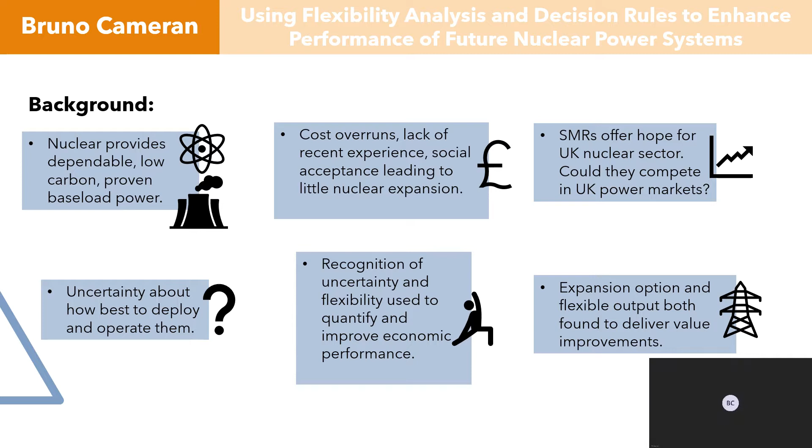I will now talk to you about my individual thesis, which focuses on nuclear power and more specifically small modular reactors. Nuclear power is currently the only proven low-carbon, reliable source of baseload power. Because of this, it could play a large role in decarbonising the UK power sector, which currently produces 90 megatons of CO2 per year. Despite this, no new nuclear power stations have been constructed in the UK since 1995. Cost overruns, a lack of recent construction experience, and safety concerns have all contributed towards this.

One way of potentially overcoming these problems is through the deployment of small modular reactors, or SMRs. These are designed to be small to exploit benefits of their size, such as the ability to be factory fabricated, thus reducing construction costs. This study looks at how SMRs may be able to emancipate nuclear power from government subsidies by being able to compete in UK power markets. Not being dependent on government subsidy and being cheaper to deploy would in theory remove two of the main barriers to nuclear deployment. If SMRs can successfully be deployed in the UK, then they may make a significant contribution towards decarbonising the UK power sector.

Because SMRs are still currently under development, there is no experience as to how best to operate and deploy them. If they are to compete in the competitive power markets, there is also significant uncertainty around the price and demand that they will be able to exploit. This uncertainty could discourage investment and hence limit the emissions reductions achieved by SMRs. Stochastic modelling was used to provide a quantitative analysis of system performance to assess how viable it is to deploy SMRs with no revenue certainty and instead to compete in the UK power markets.

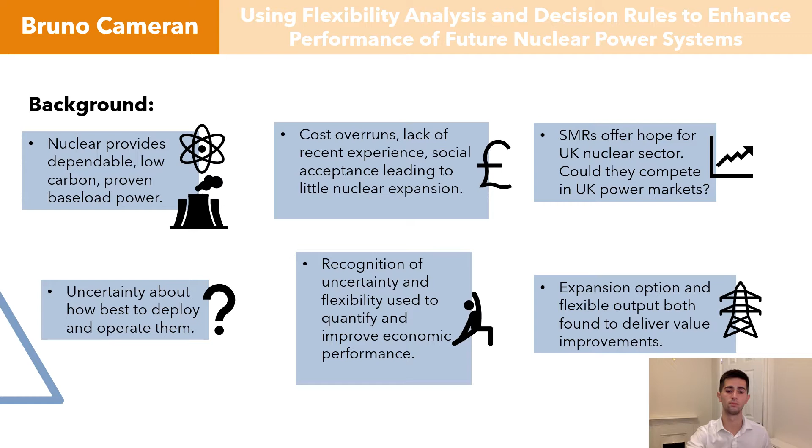To stochastically model the system performance, we first attain parameters for the evolution of the uncertain variables, that's electricity price and demand, from historic data. We then feed these variables into the model of the system, which produces the corresponding system performance, i.e. how much money the system either makes or loses over the 30-year simulation. This simulation is run 10,000 times, and the average of all the system performances is the expected net present value, or ENPV. The system size was then enumerated to find the optimum. This was found to be 58 modules, which is 3.48 gigawatts of electrical capacity.

This research shows that SMRs have the potential to deliver large economic value whilst also delivering low carbon and reliable power. They therefore are worthy of continued research and development, as at present their technology readiness level sits at 4 or 5. This study also finds that the ability to start with a small system and expand according to market conditions delivers the largest increase in economic performance, whilst also reducing the downside risk and limiting potential losses.

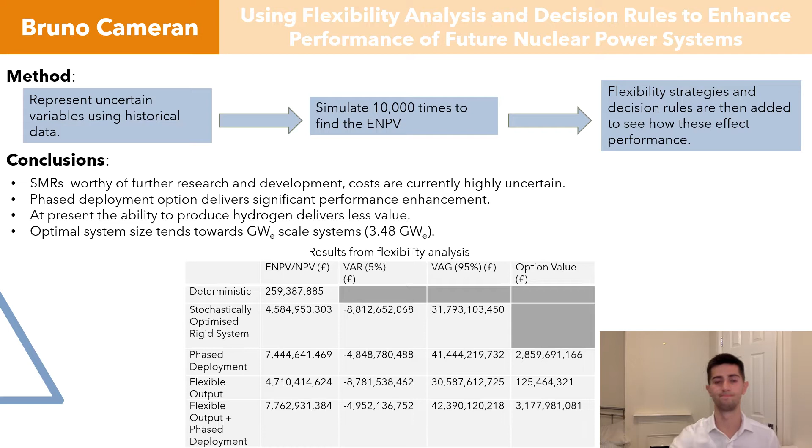The increase of renewable energy in electrical grids makes new challenges appear. For instance, the intermittency of renewables creates a mismatch between the demand and supply curve. A few solutions exist to mitigate this problem: energy storage, amongst others. Energy storage consists in storing energy when excess energy is present on the network and then releasing this energy when demand exceeds power generation.

A lot of different technologies for storing energy already exist, and a few use reciprocating devices. That is to say, devices that compress a fluid, such as air or hydrogen, from a low pressure state to a high pressure state. It's easy to understand that these reciprocating devices really are at the heart of these energy storage technologies. Therefore, knowing precisely what happens in these devices is key to optimize their functioning.

Moreover, heat transfer is one of the biggest sources of losses in such devices, and therefore modeling heat transfer is critical to minimizing losses and maximizing round-trip efficiency for storing energy. Using computational fluid dynamics to model the physical phenomena that interplay inside reciprocating devices has proven to be really efficient, but sometimes does require a long computational time, which can be a problem when you want to iterate your simulation over a wide range of cases, for example, to find optimality.

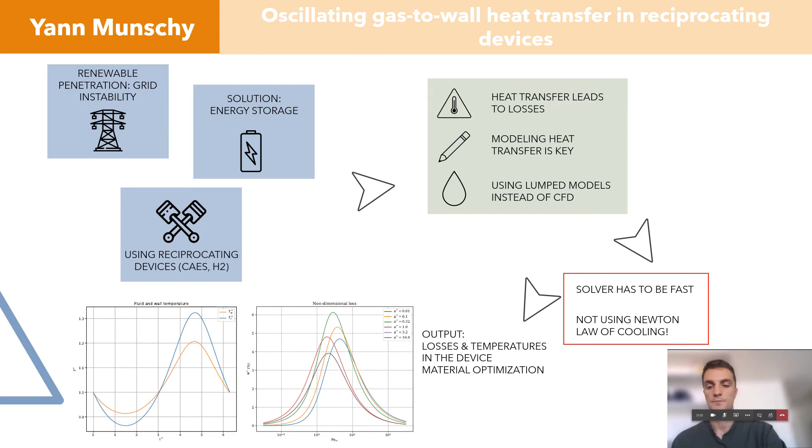And as you can see, the outputs of the model are the temperature profiles of the fluid and of the inside wall. These two quantities drive thermal losses. It is then possible to compute losses for different parameters, as done on the right curve. The first implemented solver uses Fourier series and spectral analysis, while the other one uses finite differences to solve the partial differential equation that comes from the model.

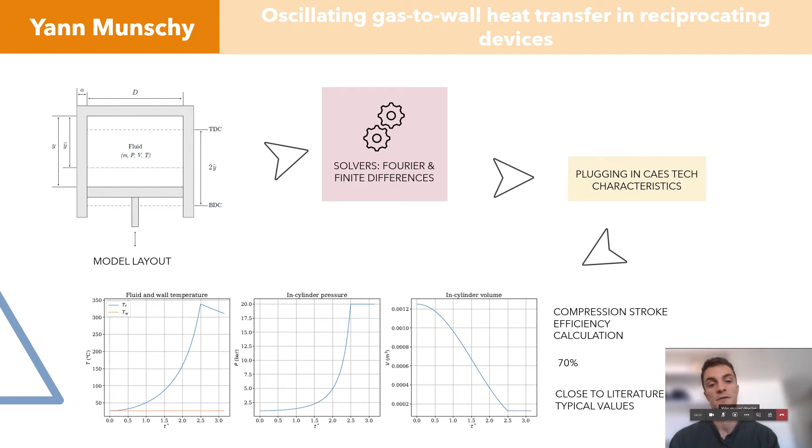From those curves, you can derive a theoretical thermal efficiency of the device. And it's quite interesting because the model gave 70% efficiency, a number which is quite close to the numbers you can find in the literature, around 70% as well. The model only takes less than a second to solve, so that's a good alternative to computational fluid dynamics while being reliable. It is then possible to use it to iterate over different materials to find the optimum configuration.

Currently, most of the grid-related stationary energy systems installed are lead-acid, but there are also several newer technologies emerging such as redox flow batteries. These batteries' main function is to provide spinning reserves during grid failure and absorb or discharge energy to the grid to regulate its frequency and voltage. Redox flow batteries have many advantages, including high round-trip efficiency, scalability, flexibility, high responsiveness, and long lifetime, which allows them to be a strong and versatile contender for large stationary energy storage systems.

However, as a part of the low-carbon future, it's important to understand the environmental burden that lies behind the installments of these batteries. Currently, there is very limited systematic assessment on the environmental impact of redox flow batteries, and no other chemistries have been investigated other than vanadium. Therefore, this thesis is carried out to explore redox flow batteries in the larger picture. Lifecycle assessment is used as a method to investigate and compare the global warming potential associated with vanadium, hydrogen bromine, and hydrogen manganese redox flow batteries, and the scope of this study covers the production and operation.

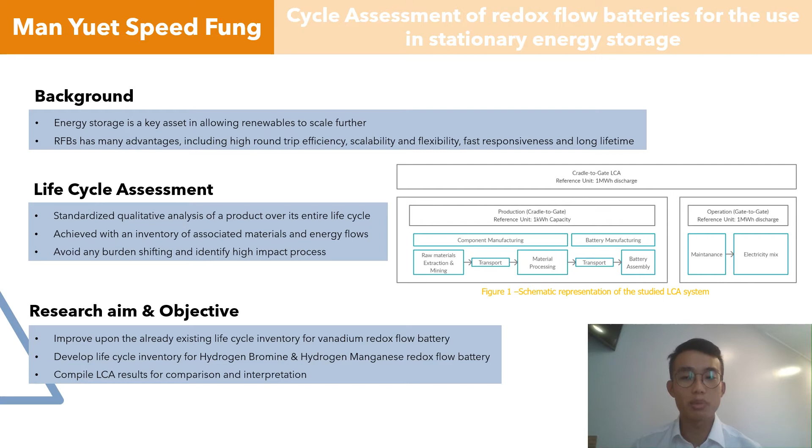Lifecycle assessment is a standardized analysis of a product over its entire lifetime to assess the potential environmental impacts. By taking a life cycle perspective in tackling the environmental problem, it allows a full analysis across the whole life cycle of the product. This systematic approach can more effectively avoid any burden shifting between processes and allow identification of high impact processes within the life cycle stages.

For production, a detailed life cycle inventory was built to specify all the raw materials, energy required, and transport for the construction of the batteries. Different chemistries were adapted accordingly with specific components to best represent different systems. For operation, the performance of the battery and any maintenance required was modeled. Both the Germany and UK electricity grids were modeled in the operation phase.

The production results show that all production is dominated by energy components. Vanadium has significantly higher global warming potential associated. That mainly came from the electricity usage in the production of vanadium pentoxide. The high coal content in South Africa is the main contributor. Whereas bromine production for hydrogen bromine systems is sensitive to the heat mix. It is interesting to point out that even though the hydrogen redox flow battery requires less electrolyte, energy storage is the same or higher than vanadium.

For the final results, hydrogen manganese was shown to be more competitive than other chemistries, with lower global warming potential in all stages, which came from the less global warming potential intensive electrolyte and a higher round-trip efficiency. Whereas hydrogen bromine shows a competitive production with shortfalls in its low round-trip efficiency. Findings show that both round-trip efficiency and the utilized electricity mix are dominant in the total global warming potential, with use phase accounting for more than 95% of the total, where a change in electricity mix from Germany to UK led to a 16% decrease across all the chemistries.

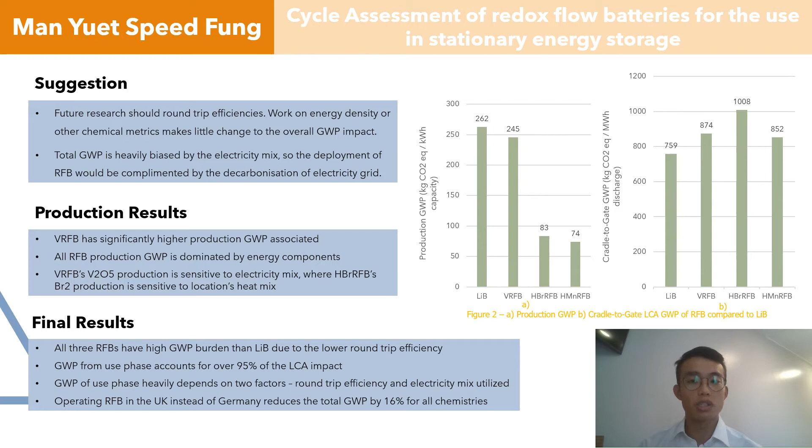It's clear that the new chemistries investigated acquired much less global warming potential burden in the production phase than vanadium or lithium-ion batteries. However, since redox flow batteries fall short in round-trip efficiency, lithium-ion batteries still have the edge in the use phase and therefore the total result. From interpreting the results, it suggested that future research should primarily address the low round-trip efficiency of redox flow batteries to dramatically reduce the total global warming potential. Work on energy density or other metrics makes little change to the overall impact. Total global warming potential is heavily biased by the electricity mix also, so the deployment of redox flow batteries will be hugely benefited when complemented with the decarbonization of the electricity grid.

Thank you very much for that amazing insight. Now we will talk about the first of the many solar technologies that our team is going to present today. So firstly, we have concentrated solar power. And as the name suggests, the way that this technology works is solar radiation is concentrated by mirrors on glass tubes. And these glass tubes contain working fluids inside of them which are heated. Heat exchangers are then used to extract this thermal energy and generate steam to drive a turbine. And this is very typical of what you find in power stations which use the Rankine cycle.

Now, as of January 2020, the global installed capacity of concentrated solar power plants reached 6.1 gigawatts. And this technology is still in its early adoption stage. But its key competitive advantage over other technologies, such as solar panels, is that the energy can be stored using thermal storage tanks, making this technology non-intermittent. And also it has a great potential for scalability at lower levelized cost of electricity.

The focus of this research, however, is on a very specific type of CSP technology known as direct steam generation. You can see this in figure B, and as you can see, this system actually does not require any heat exchangers. That is because the working fluid of this system is water, and you can directly generate steam to drive the turbine, whereas in the other typical CSPs, you use synthetic oils which have very high evaporating temperatures. As a result, we avoid the capital cost from heat exchangers, and also you increase the thermal efficiency of the facility because you're able to increase the operating temperature and pressures at the inlet of the turbine.

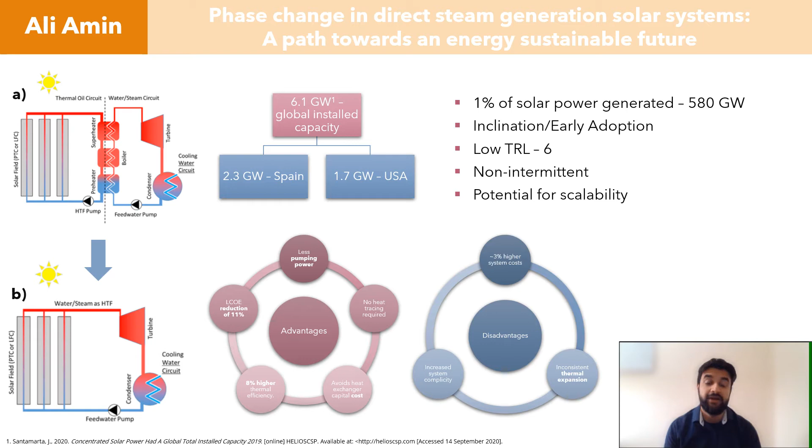However, all of these benefits do come at the expense of system complexities, and this is mainly because the liquid and the vapor phase flow in conjunction with each other. This gives rise to pressure drops and heat transfer coefficients which depend on how the two phases are traveling and what proportion of the pipe each of these phases cover. Now that we have set the context for this technology, let's look at where this research fits in and why it provides a critical insight into the study of flow patterns and pressure drops.

The research can essentially be split into three stages. Firstly, we have to characterize the different flow patterns which can be seen here and have a method to differentiate between them. And the other two stages include how accurately we can predict what type of flow pattern is going to occur at any given mass velocity and vapor quality. Secondly, what are the pressure drops the system is going to experience? And that is important because the facility needs to compensate for these for a safe and efficient operation cycle.

So, high-speed visualization data was taken from a flow boiling facility at Imperial College, and using MATLAB, a quantitative method was created to define each flow pattern. As you can see, the code works by first calculating the mean pixel color along this red line for each frame, and then this is run in a loop for thousands of frames in a video to generate the signal. This provided a robust and unique way to characterize the different types of two-phase flows that we see inside the pipe.

Now, the second stage was about predicting these based upon set experimental conditions, and this was done by validating well-documented flow pattern maps. Through our research, we showed that these flow pattern maps work well for some flow patterns and not well for others. And so we proposed a new version which had increased accuracy for predicting flow patterns in the lower mass velocity and vapor quality regions.

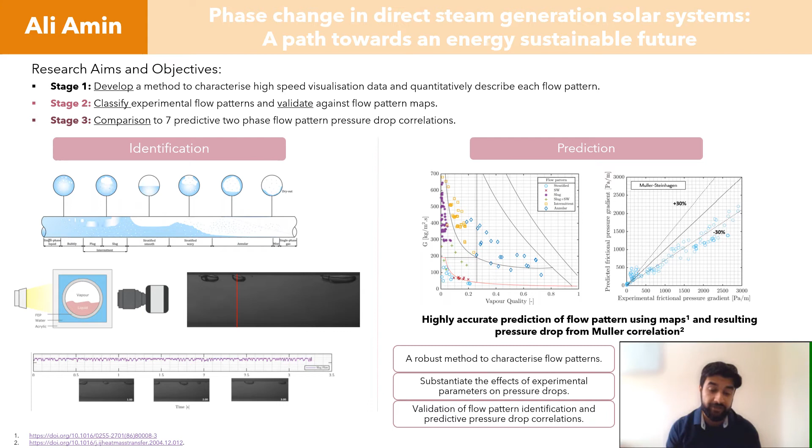Finally, and most importantly, the experimental pressure drop measurements were compared against 7 predictive correlations. These are essentially mathematical equations which consider the effects of fluid properties and other operating conditions and what impact they have on pressure drops. As you can see, we identified a very well-established model to work reasonably well for our set of data. So this research essentially added to current knowledge surrounding flow patterns and pressure drops in two-phase flows. And now Josh will further elaborate on this with a focus on heat transfer coefficients and explain what the future of direct steam generation holds.

Thank you, Ali. So, similar to Ali, my research project was also focused on direct steam generation technology. However, my research was concerned with heat transfer rather than pressure drop. The major research questions that I addressed were: how can flow behavior influence the heat transfer capability and therefore the power produced by the system? And how accurate are heat transfer models available from the literature for the prediction of the heat transfer coefficient?

To answer these questions, an in-depth analysis was conducted using experimental data collected from a facility designed to closely represent the conditions that occur within direct steam generation systems. Firstly, a high-speed camera was used, and these images were then processed using MATLAB to extract quantitative information and analyze the flow's characteristic features.

It was found that the flow structure could exist in many different formations depending on the experimental operating conditions. Naturally, the horizontal orientation of the pipe often caused the flow to accumulate towards the bottom of the pipe, and this meant that only roughly half of the inner circumference of the pipe was coated with liquid. As a result, this type of flow possessed poor heat transfer capability and resulted in a low overall heat transfer coefficient. However, higher temperature and higher velocity flow could promote the development of an annular flow structure which formed a liquid ring around the entire inner circumference of the pipe.

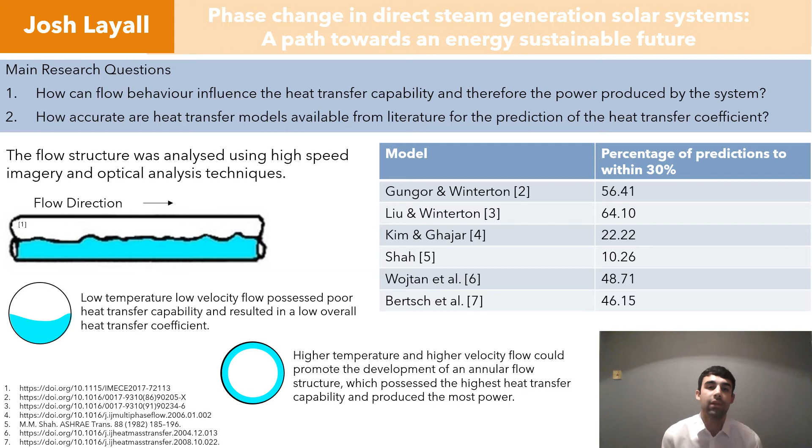To answer the second question, again, MATLAB was used, but this time to evaluate 6 different heat transfer models available from the literature. These ranged from models developed for large and small diameter pipes, and also those developed for different experimental conditions. It was found that the models developed for smaller diameter pipes were not able to predict the heat transfer coefficient very accurately. However, 4 of the tested models were able to predict approximately 50% of the data points to within 30% of the experimental value, and the most accurate model was capable of predicting 64% of the data points to within 30% of the experimental value.

So to give you some context about the technology, currently the globally installed capacity of concentrated solar power systems is 6.1 gigawatts, with Spain possessing the largest installed capacity at 2.3 gigawatts, followed by the United States at 1.7 gigawatts. A total of 8 direct steam generation projects have been successful so far, with some of these existing in prototype form simply to prove the commercial viability of the technology.

One of the major benefits of direct steam generation technology is that it can provide a considerably more efficient power system compared to concentrated solar power. And this means that the overall system size can be reduced, and therefore this reduces the overall capital cost. In the future, small-scale, affordable, distributed direct steam generation systems could be used to provide clean electricity in developing regions that are lacking infrastructure and that would otherwise rely on harmful fossil fuel sources for their power generation.

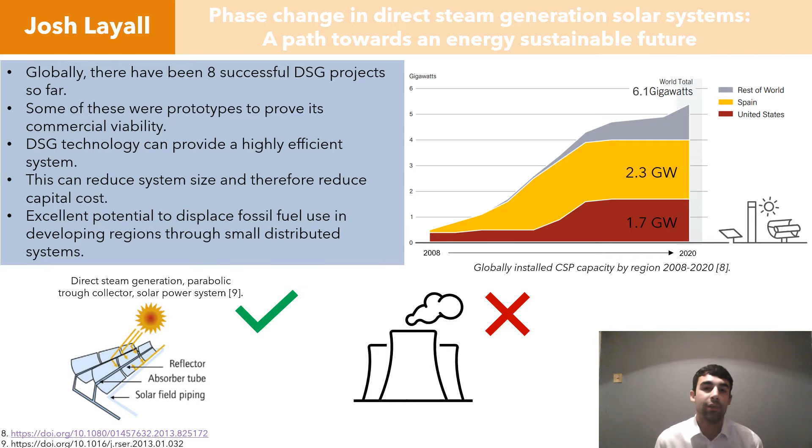The need for technological innovation is clear. If its challenges are overcome, direct steam generation technology demonstrates significant potential to facilitate the sustainable development of some of the most vulnerable regions around the world. Thank you. So, keeping in with the theme of solar power, I would now like to pass you over to Hugo.

Thank you, Josh. We have just seen one way to utilize the energy from the sun, and that is direct steam generation. Another way to utilize this energy is through PV cells. The PV cell industry is one of the fastest growing in the world, but their efficiency is limited by their temperature. Now, the research community has shown great interest in addressing this problem and has come up with PVT systems, photovoltaic thermal systems. They will typically feature a fluid, water, flowing in contact with the PV cell, extracting the waste heat and therefore adding a thermal output to the electrical output. The overall efficiency of the module will therefore be higher. Now, these systems are typically expensive since they require pumping and solar light concentrators.

Now, this work will feature three alternative and innovative technologies, which are firstly the hydrogel. Now, hydrogel is a material composed of up to 98% water. The rest is a polymeric matrix, which features a reduced evaporation enthalpy, which means that the water concretely evaporates at a temperature of around 40 degrees. Now, this allows for the hydrogel to be coupled to the PV cell in contact with it, and now the excess energy will turn the water inside the hydrogel into vapor and will not go into the PV cell, therefore reducing its efficiency.

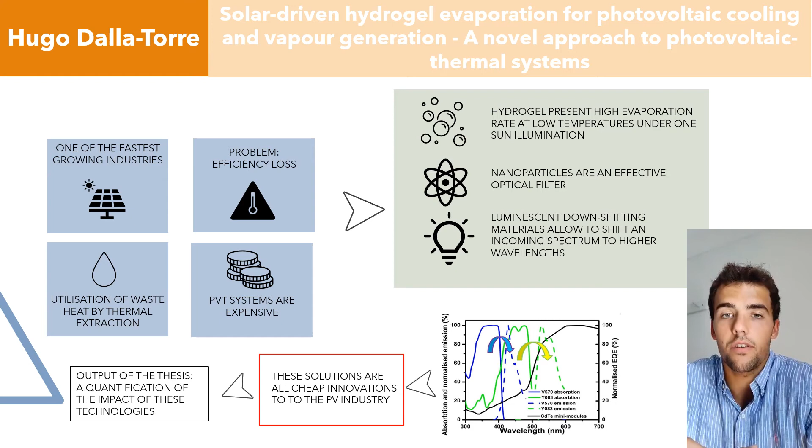The output of this work will be to quantify the impact of these technologies and concretely calculate the efficiency of each module featuring these technologies. This work will present a systematic approach to the calibration of a new type of solar cell thermo and electrical model. It will also present a model for the hydrogel behavior, since there is no theoretical background work on the hydrogel. And lastly, it will propose a model for the action of the luminescent downshifting layer on an incoming spectrum. Here it will be AM 1.5.

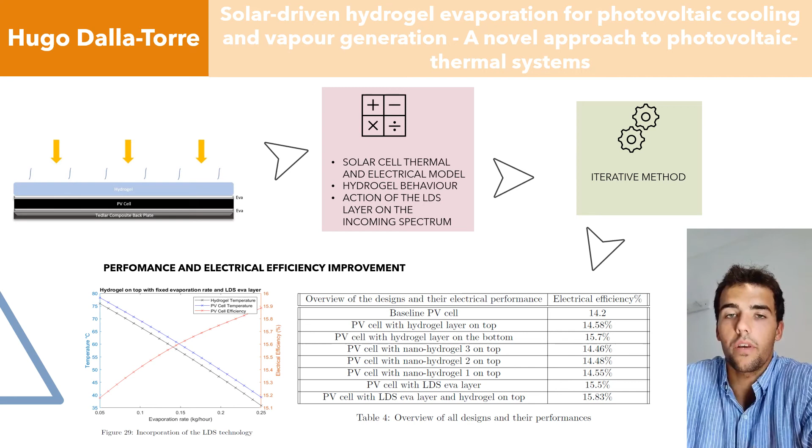Now, each design will be assessed through the thermal model, and the temperature will be solved using the iterative method. Once these temperatures are solved, we can calculate the efficiency of the solar module featuring each technology. As you can see in the table at the left of me, we have the overview of each design and the electrical efficiency associated with it.

Hi, my name is Dusit Munkong, and today I'll be presenting on optimizing solar PV and battery storage retrofit for commercial buildings in the UK.

So first, solar resources in the UK vary greatly from 700 kilowatt hours per square meter in the north to 1,100 kilowatt hours per square meter in the south, as shown in the top left picture. In addition, each commercial building has its own features, electricity demand, and also costs associated with operating the building. Therefore, an integrated optimization model is developed in this thesis in order to predict the most optimum system to install for each commercial building in the UK.

Currently, there are many PV and battery technologies available in the market, as shown in the bottom left picture. Each of them has different technical performances and also costs associated with the installations. Therefore, the optimization model in this thesis is developed to help select the best configurations of technologies that can help minimize the cost of operating the building.

Although this model considers the specific context of policy incentives in the UK, if the end user would like to consider installations in any other countries, they can adjust or incorporate any policies that are available in their country in order to identify the best possible optimized systems in their locations.

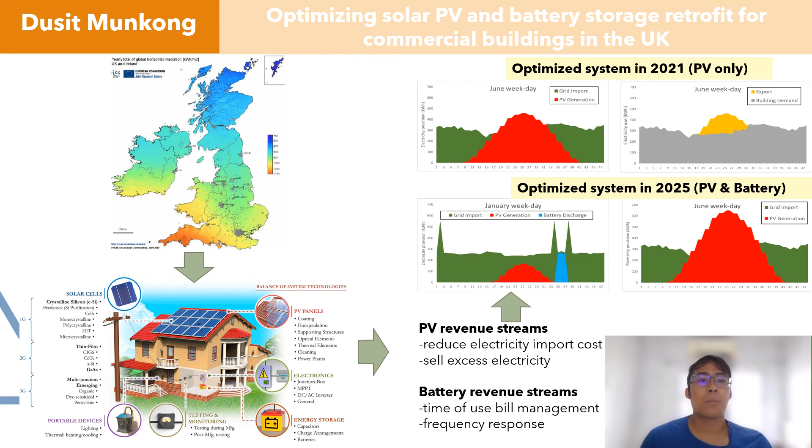So I would like to thank you all for paying attention to my presentation. And next, Teresa will present her work on wind technologies and also provide some conclusions of our collaborative work. Thank you, Dusit, for that insightful presentation.

Hello everyone, my name is Teresa and I completed my project on wind energy, which alongside solar, as previously presented by some of my teammates, is also one of the leading renewable technologies with one of the highest shares in the current energy sector. Wind is naturally replenished, it can be repeatedly used, and it currently has one of the lowest levelized costs of energy among all technologies. All of this has led to wind currently accounting for over 26% of the worldwide renewable electricity supply.

However, this sector still faces many challenges. Many of these are due to the fact that wind is now moving from the onshore to the offshore environment, which has its own set of conditions. Additionally, regions and nations where this technology was previously unexplored are now hoping to develop wind and are facing technological, economic, and political challenges along the way. That is the case, for instance, in East Asia, where the high frequency of extreme weather events makes the development of offshore wind particularly hard.

Given that China is expected to become the leading nation in the offshore wind energy market in just a matter of years, and that it faces many of these challenges, my thesis aimed to analyze the impact of typhoons on the offshore Chinese market through the assessment of the current level of resilience of offshore wind farms in the provinces of Guangdong and Fujian.

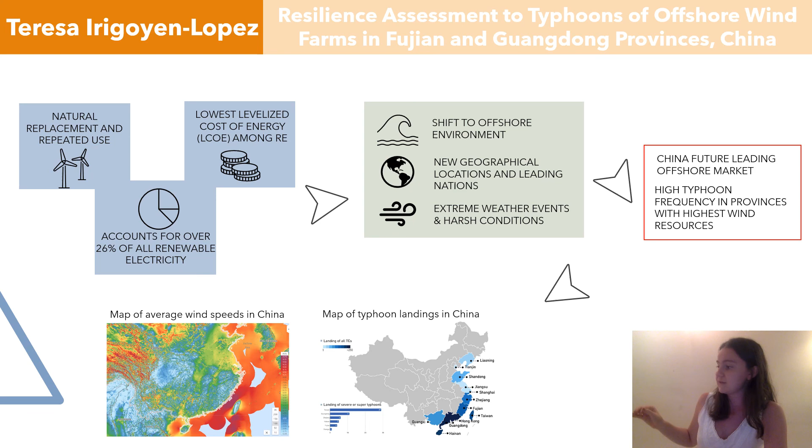The two maps included in this slide aim to present precisely that China has rich wind resources as per the map on the left, where the regions on the southeastern coast in dark red show the highest annual mean wind speeds, and the map on the right showing the high frequency of typhoon landings in those same provinces, now shown in dark blue.

In order to understand the very complicated relationship between rich wind resources and the harsh conditions to which these wind farms are exposed, my thesis employed WAsP software developed by DTU in Denmark. WAsP software was chosen because it can perform a variety of calculations, including energy yield, wind farm efficiency, wind resource and turbulence assessment, optimize turbine siting locations, and perform a complete site assessment based on the International Electrotechnical Commission or IEC standards.

Overall, the results show that specific strategies can improve the wind farm performance. However, none of the wind farms in the region studied are expected to survive because the turbines employed are simply not designed to withstand the extreme weather events to which they're exposed. Therefore, for future development of offshore wind farms in the region, turbines specifically designed to withstand typhoons, or of IEC class S, ought to be used.